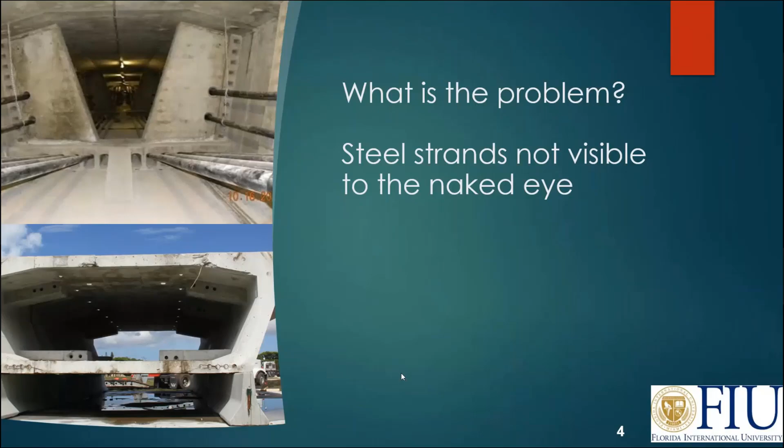Over the years that I've been involved in detecting corrosion or assessing the health of the steel strand in the segmental concrete bridge, in my opinion, the magnetic flux leakage method at the present time is the best method that is available. I will elaborate on some other techniques that may have some applications. Now, MFL, I'm going to explain what the MFL is. You can look at it as like an MRI machine: as a patient you go under the machine, the magnetic field is generated, and you can see the different organs and so on. So the MFL is really kind of the equivalent of the MRI for the bridge.

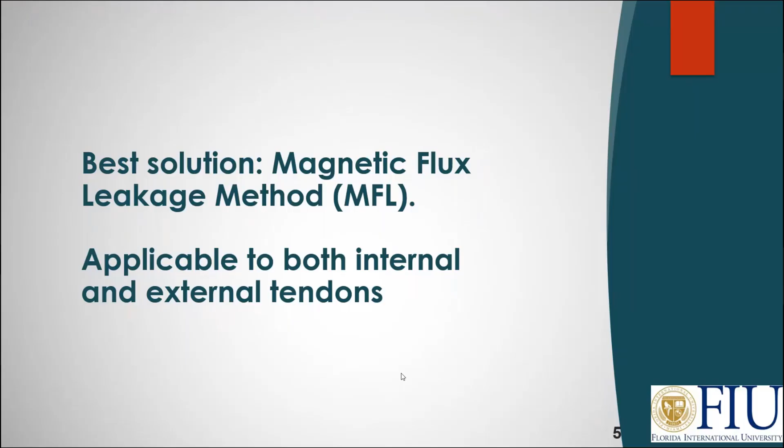Now, the good news is that this MFL is applicable to both internal tendons and external tendons. By internal tendons, I mean, for example, in the segmental concrete bridge, you can have a hole in the slabs, in the walls, in the top and the bottom, and then you have a steel strand in there. That's what I mean by internal tendon. External tendons are the tendons that are visible.

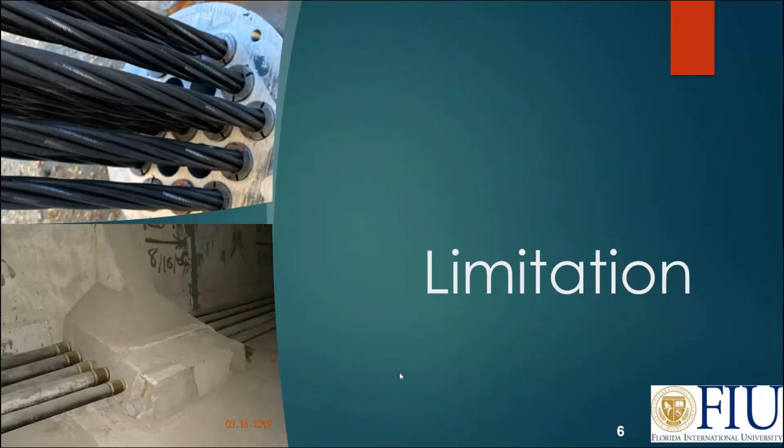MFL has limitations. MFL cannot be used in the areas where the tendons are interrupted, like deviators, or the anchorage area. In my opinion, the only method that I know of that could be applicable to the anchorage area or a deviator area is X-ray. Now, many problems actually happen in the anchorage areas, but MFL has a limitation that you cannot apply it to the areas where the anchorage is located.

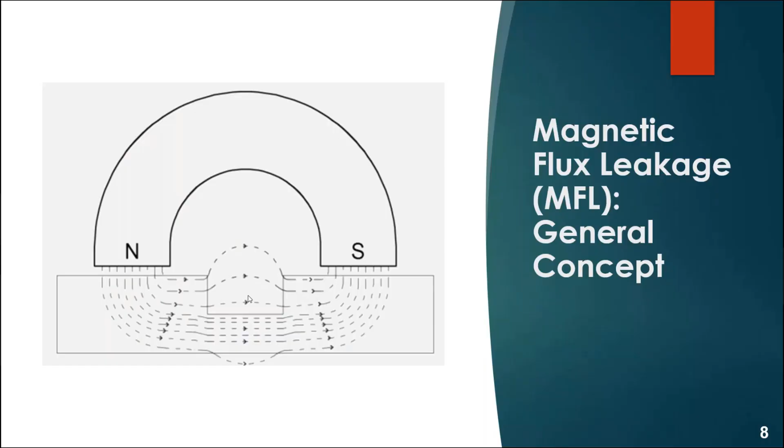Now, when there is a section loss due to corrosion or wire breakage, that airflow or the flux is interrupted, causing the flux to change, to leak, and that's where the name comes in, magnetic flux leakage. So the flux leaks because of the corrosion or a section loss and so on. Now we put a Hall sensor, and a Hall sensor is able to monitor the flux. When there is a change in the flux, the Hall sensor detects that by changing the voltage output. And that voltage output is what we use to try to say what the condition is.

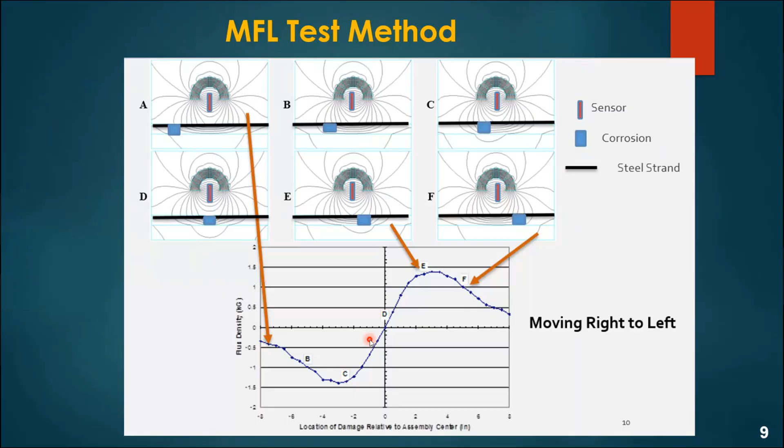Now, this is a busier slide, but concentrate just on the bottom. You see it like a sinusoidal. So when you cross an abnormality or a section loss, in general you get signals like this. It's not usually as clean as what you see over here. And another thing that I should say, this method is not something where you can just take a device and go and try to inspect something. You have to have some experience, some trained eyes, because the signal sometimes is modified based on what else is there.

So in general, there are two methods of MFL, what I call active MFL or residual MFL. So let's see what each one does. Active MFL is where you build a device that includes the Hall sensors and the magnet.

So you are taking the signal while the magnet is present. So that's why we say active MFL method. The disadvantage of this method in general is the magnet. Depending on what kind of magnet you use, you can use a permanent magnet or you can use an electromagnet. And usually the magnet is very heavy, and to incorporate a magnet inside the non-destructive equipment that also has the Hall sensors makes the equipment very heavy.

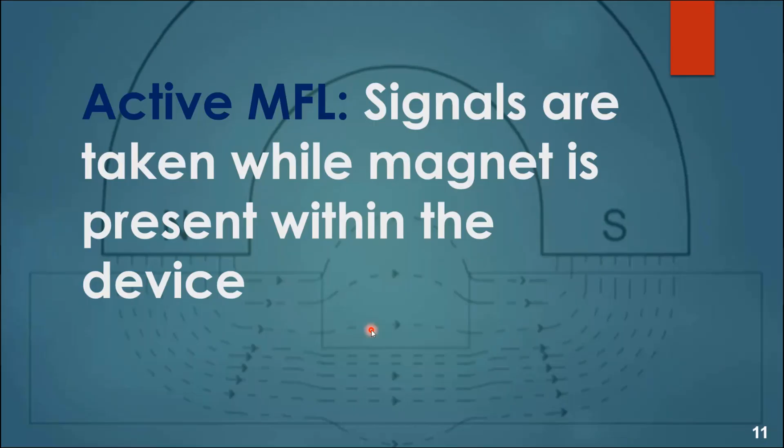Now, you're going to see that for external tendons, actually we are using an active MFL. What we have been able to do is develop equipment that, including the magnet, weighs only 12 or 13 pounds, and it's very light. But in general, active MFL is heavy because of the magnet. If you use a permanent magnet, it adds the weight. And if you use an electromagnet, that's really heavy.

Residual MFL is where you magnetize the strands first, and then you come back and with a non-destructive device, you monitor basically the flux, and that's called the residual MFL. So each one of them has an advantage and a disadvantage. But in our method, you're going to see that we are using active MFL, but we've been able to develop the equipment so that it's only 12 pounds.

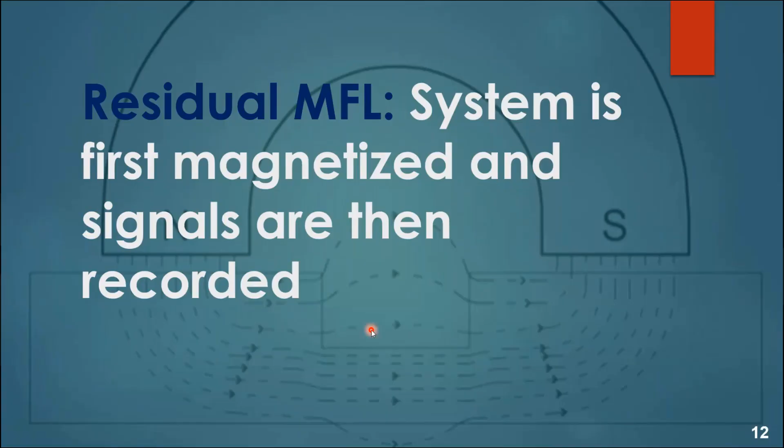I mentioned that the MFL is applicable to both internal tendons and external tendons. Now, the focus of this presentation is on external tendons, but we have done lots of work that was sponsored by Florida DOT on the internal tendons, and I'm going to just show you an overview because I know some people might be interested in that.

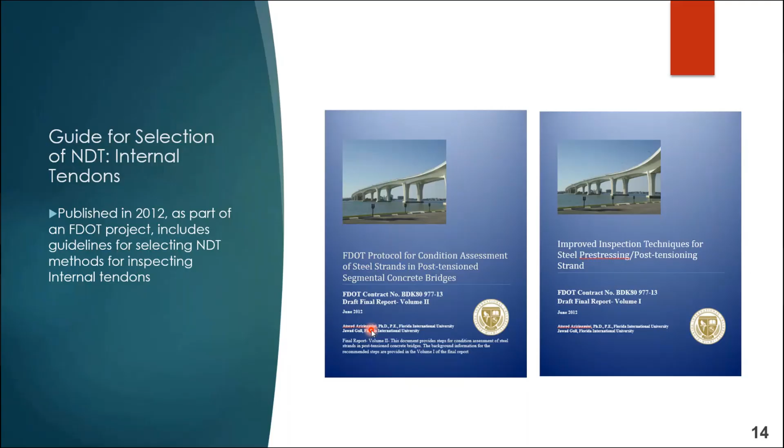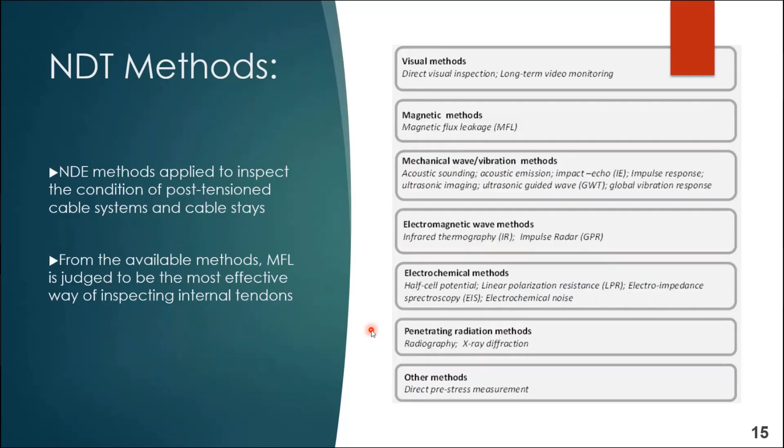Back in 2012, with a project that was sponsored by the Florida DOT, we conducted extensive work trying to identify all the available technologies for assessing the health of the steel strand in the internal tendon. We published two reports that are available from the Florida DOT. And this report has all the different non-destructive techniques available to inspect steel strands that are inside the thickness of a wall, a slab or a ceiling. In my opinion, even for internal tendons, really the best method is the MFL.

Just an overview very briefly. I'm not going to show you lots of results, because our focus is on the external tendon. But for internal tendons, we've been doing lots of work over the years, and in fact, I've been inspecting some of the segmental concrete bridges, including the Missouri Bridge back when I was faculty at the University of Nebraska, Lincoln. I've inspected the major segmental concrete bridge, the entire span of it between Nebraska and Missouri.

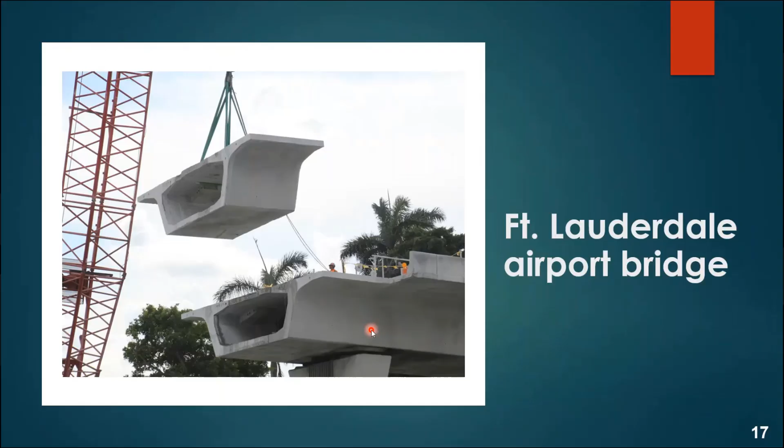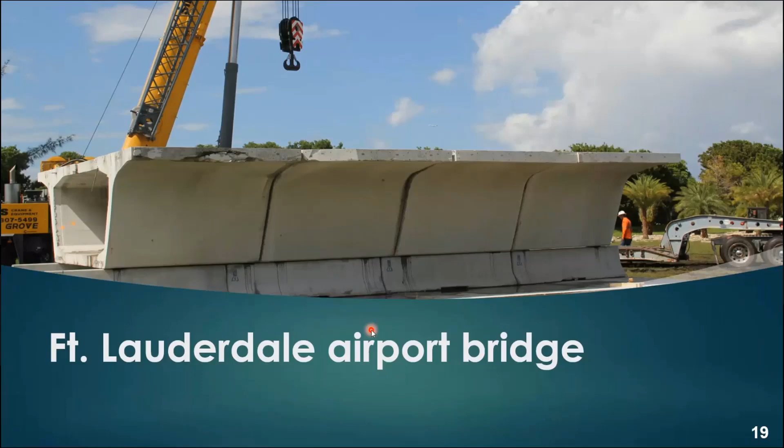At FIU, we have brought segments of a segmental concrete bridge that was taken out of service, not because of the condition, but because of rerouting the roads. Now, this shows the segments from one end. Good for us, but unfortunate for the bridge: there were a couple of ducts that were not grouted. That allowed us to place steel strands with a known corrosion level and then assess our technology.

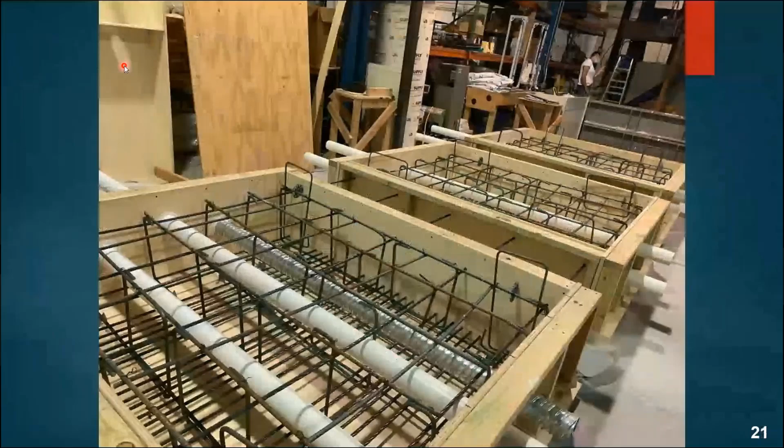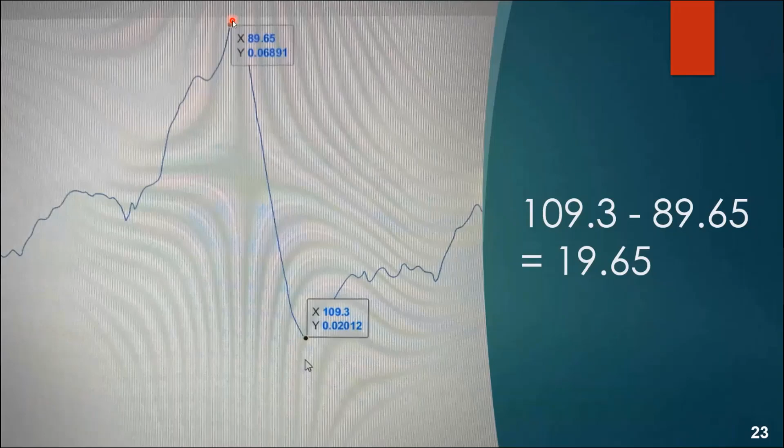Now, in the case of the internal tendons, the challenge really is that you have mild steel, and that mild steel masks the signal. But we've been able to solve that problem and assess the health of the steel strand inside. These are some of the results that we have obtained. Interestingly, I have not been able to find the reason, but when I subtract the x coordinates of the two points in the signal, that equals exactly the thickness of the slab.

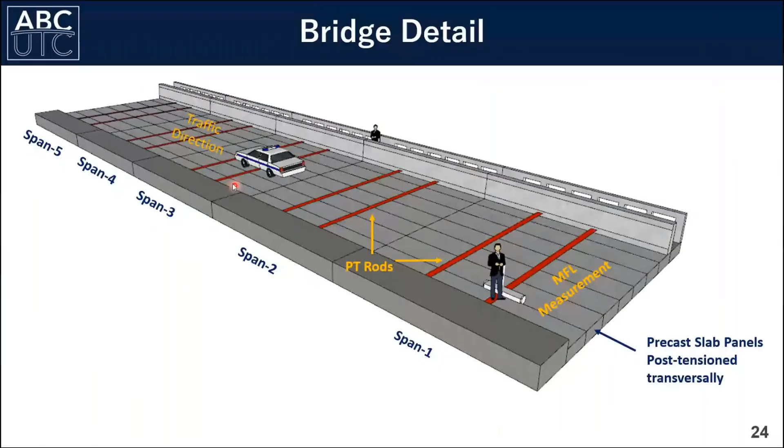We have tried our methodology for internal tendons on a bridge in Florida, and this is a device for internal tendons that we have. For the bridge that I showed you, we were able to detect the area where there was a possibility of corrosion, and that was verified by drilling a hole and looking with the borescope. Our signal and the borescope confirmed it: with the borescope we saw the corrosion, and with our device for internal tendons, we were able to detect the corrosion.

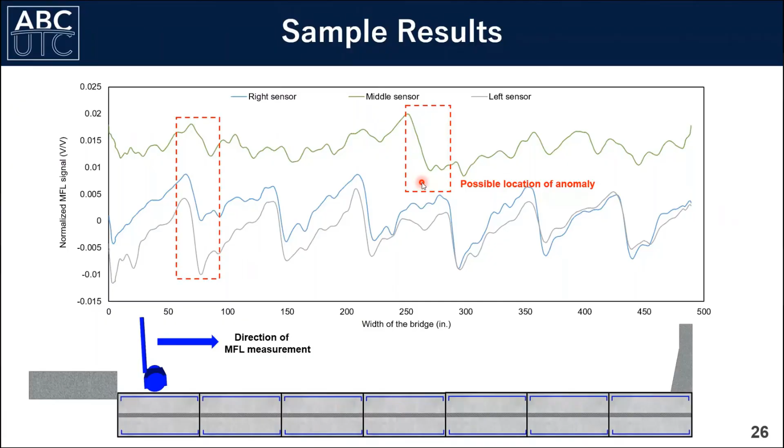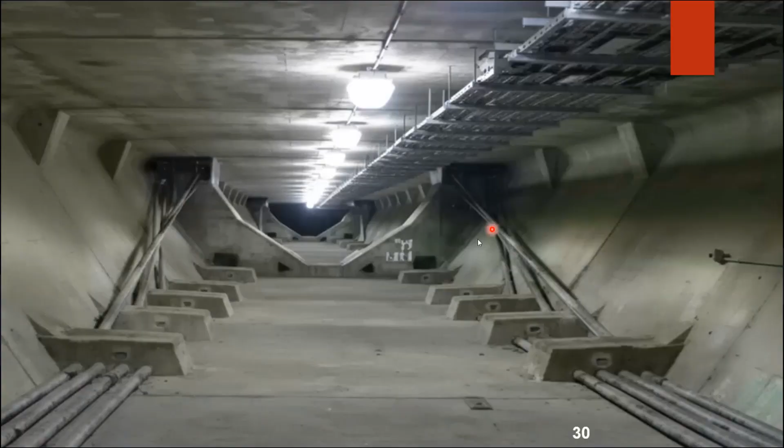The focus of today is on the external tendons. Here you see a photo of the inside of a segmental concrete bridge. Again, our limitations are that we are not able to do any inspection of the deviator or the anchorage area. Sometimes these ducts are very close to the ground, or they are very close together. We have two devices, and you will see later that they are able to inspect the straight portion.

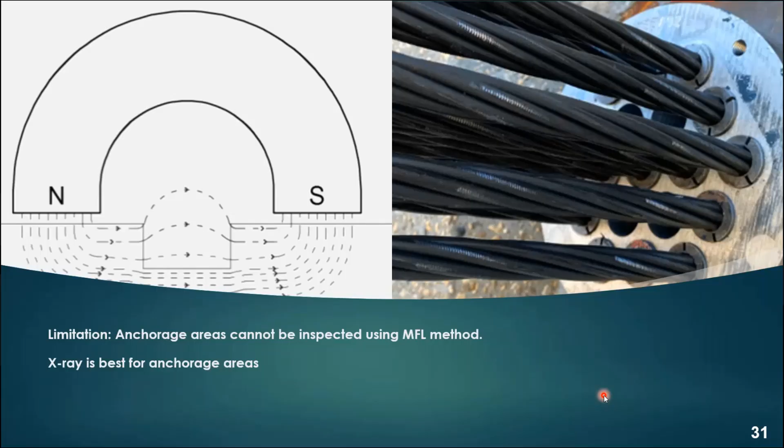We wrap all the way around, or if the tendon is such that we don't have any clearance from one side, either in the ceiling or the bottom, it can wrap just in a half-circle form. Again, the limitation, like I said, of the MFL is that we cannot inspect the anchorage areas or the deviator area. In my opinion, I think the best thing is the X-ray in that area.

Now I'm going to turn it to Dr. Ken Furton, who is going to present the very interesting concept of using dogs to detect the corrosion in external tendons. Thank you, Arturo. Looking forward to sharing with you some pretty exciting research that we've done related to canine corrosion detection. I'm a professor in the Department of Chemistry and Biochemistry.

My first slide is related to the fact that dogs have been used for hundreds of years for detection work. Most people are used to drug detection, explosives detection, maybe even microbes like mold detector dogs, human scent for tracking people, and so forth. The only other work in this area that we're aware of was some early work on corrosion under insulation of pipes that Dr. Ade Schoon in the Netherlands, who's somebody I've collaborated with, has done.

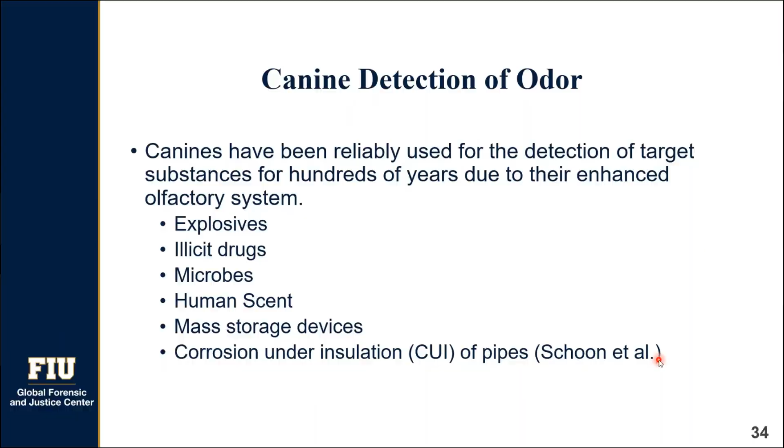Most recently, during COVID-19, we were the first in the country to deploy COVID-19 detector dogs at Miami International Airport, and they were extremely reliable, able to detect COVID. This was in a partnership with American Airlines and Miami International Airport, where if the COVID dogs alerted, the employees would go home and get tested with PCR, and the dogs were actually more accurate than the PCR tests. So we know dogs can be very reliable. The question is, can they detect corrosion with that same level of reliability?

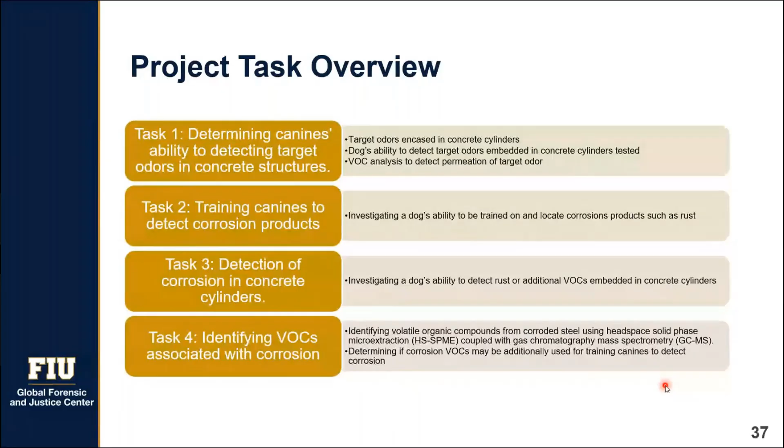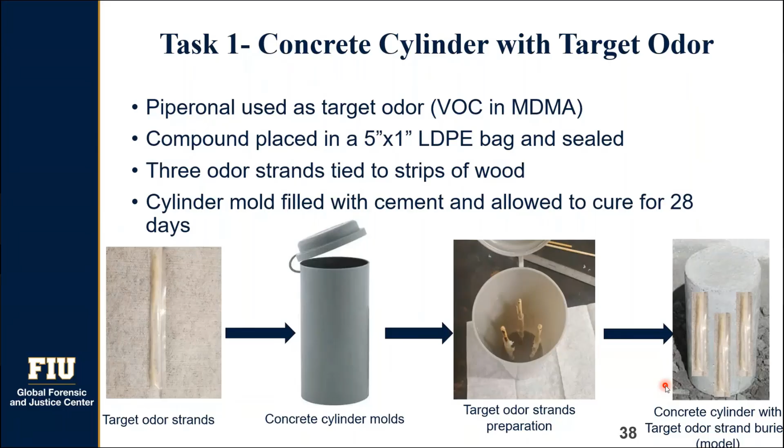In this next slide, the first thing we did was use piperonal, because in this case we used working drug dogs that were trained for ecstasy. We know they can detect piperonal as the volatile chemical of ecstasy, or MDMA. We put those into low-density polyethylene bags, something we call the controlled odor mimic permeation system. Then we put those into three odor strands tied onto strips of wood, filled cylinder molds with concrete, and cured it for 28 days to see whether the odor would even permeate out of concrete.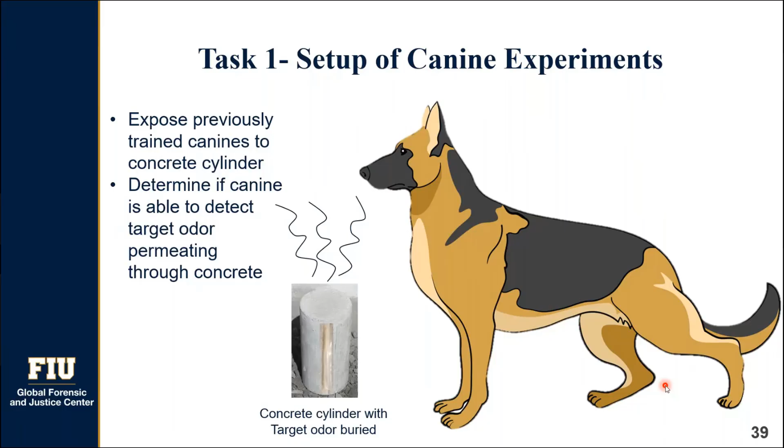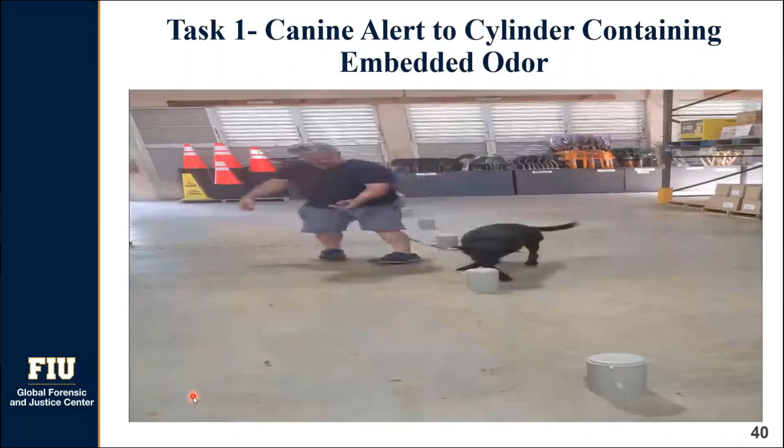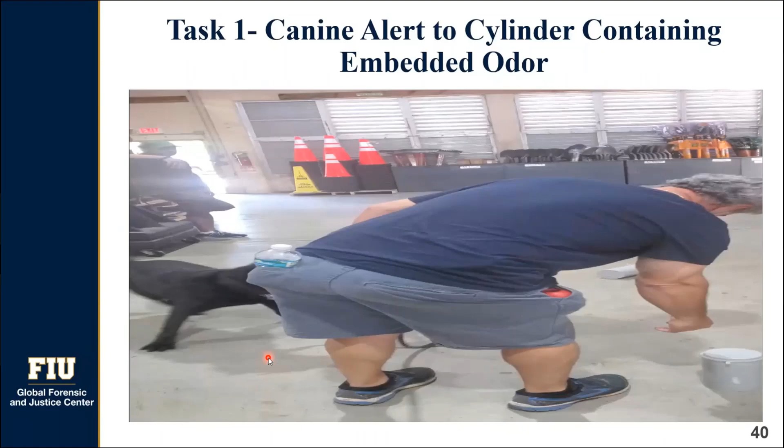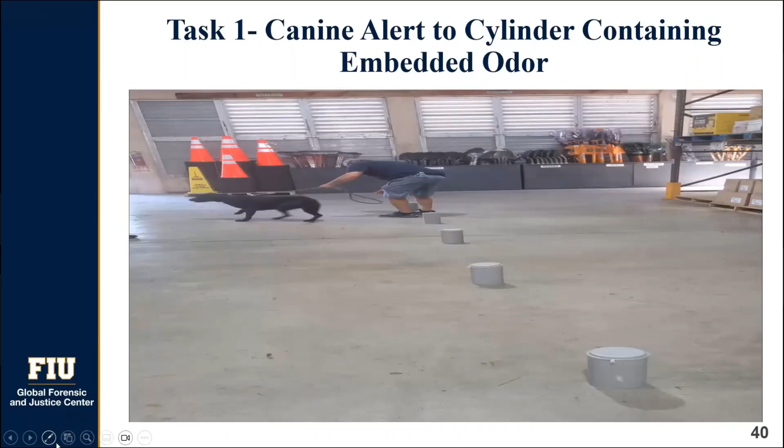I'll show you a video in the next slide where we have this piperonal within concrete, and the dogs are trained to a passive alert, or a sit. It's essentially a lineup, and if the odor is there, and we did this many times with multiple canines, we know that the odor is permeating through the concrete. We'll do it one more time so you can watch. This is a double-blind study. The dog and the handler do not know which one contains the piperonal.

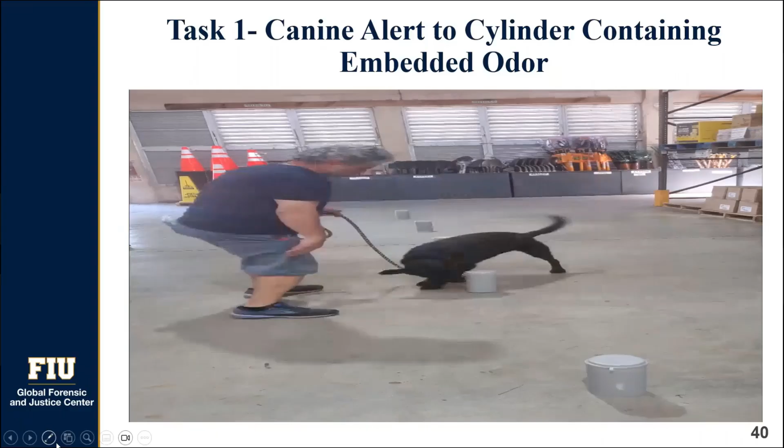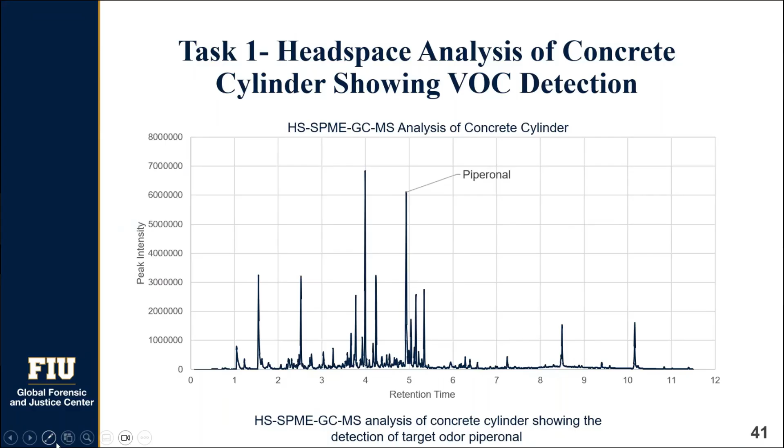And then we did a headspace analysis using gas chromatography, mass spectrometry of those cylinders. You'll see the piperonal peak, but you also see a variety of other chemicals that are there. So we are in the process now—this is an ongoing study, not a complete study—of trying to identify what are the other odor chemicals that are there, so that the dogs could be trained on corrosion odors.

for increasing the potential for using canines in this application. So the next slide shows: can dogs be reliably trained just to detect rust odor without them even being encased in concrete? So we took 5 grams of rust in the form of iron oxide in these low density polyethylene bags where we had the piperonal before, and we did black rust and red rust.

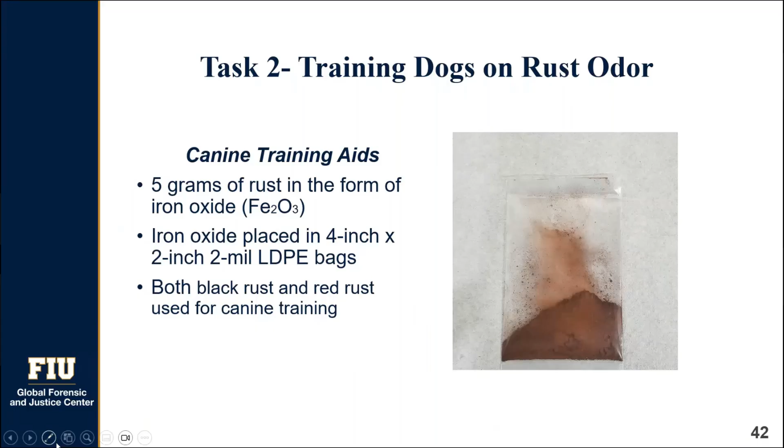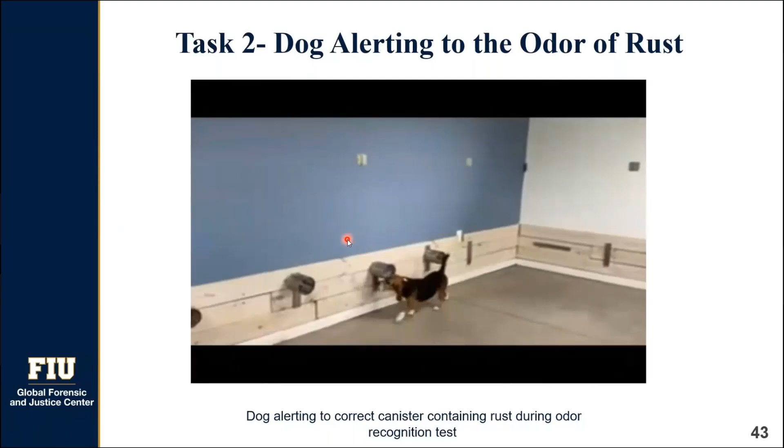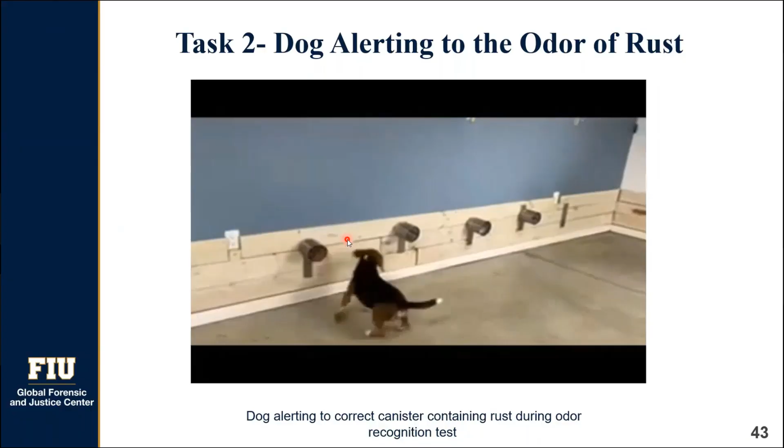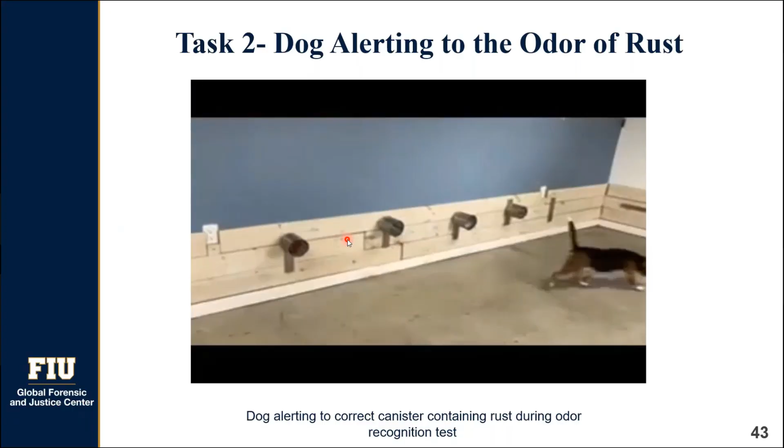And you'll see in the next video a lineup, and these are with the different dogs. These are beagles that were not trained—they're not law enforcement, they're just trained for odor detection. In this case, it's very clear these dogs are trained with a lineup: if the odor's there, they sit or stare and wait for the reward. And all these dogs are reward trained, so they just get praise or food or whatever they like to do. So beagles like to eat, so these dogs got food.

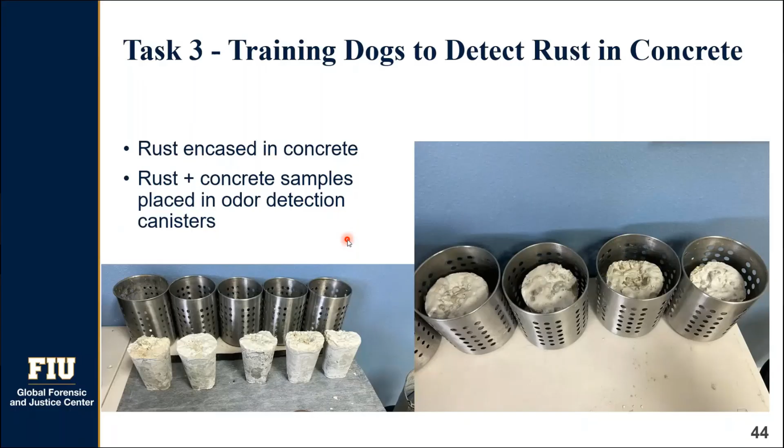And then the next task, if you go to the next slide, you'll see that we wanted to say: okay, if you took those same rust samples, put them inside concrete—again, there's no pyranol or any other odor—and these dogs had never experienced corrosion before this, will they be able to alert to the corrosion materials within concrete samples? So if you look at this next video, you'll see a lineup with the rust within the concrete.

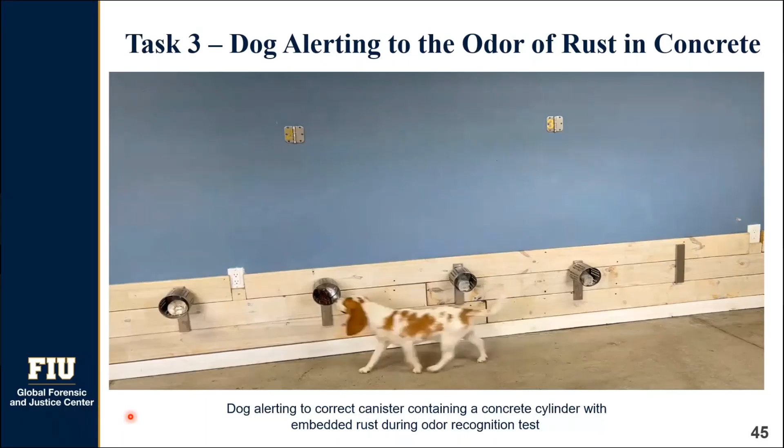And you'll see one of the things that's exceptional with the canines is they're very, very quick. So they have a high degree of mobility, and they're trained to go to whatever the highest concentration of the odor is, if there's odor there.

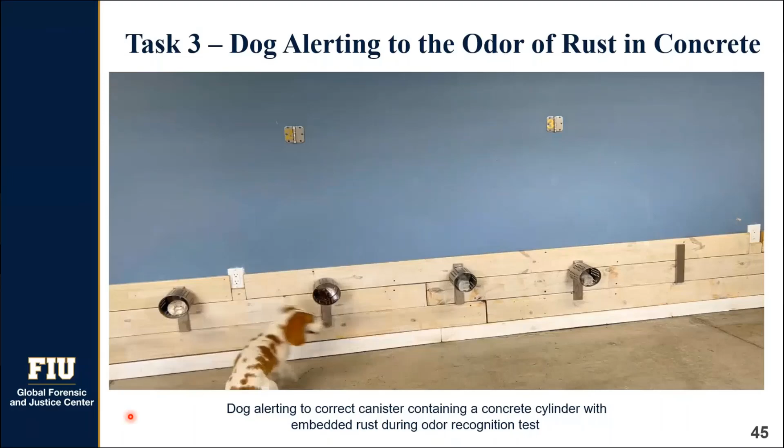And then in task 3, we did a number of dogs. We did this with 5 different canines, and these are the beagles in this particular test. You see that we were able to receive a very high level of sensitivity and specificity. We still have other dogs that we've been doing work with that we're also going to combine all this information into an article we're going to be publishing. But in general, they really have remarkable selectivity, sensitivity and specificity in terms of identifying the location.

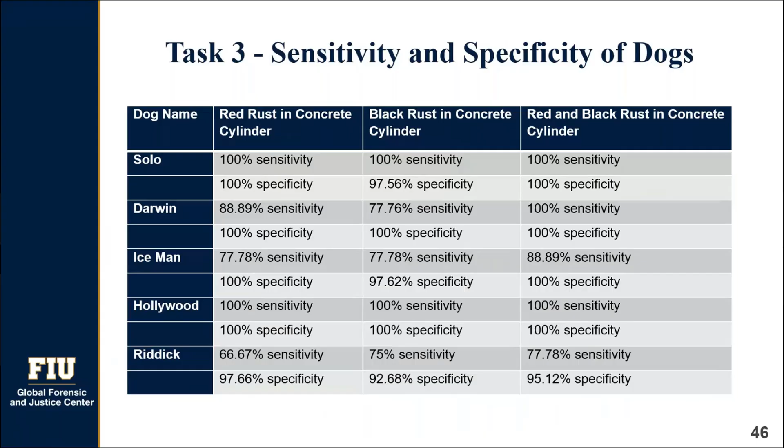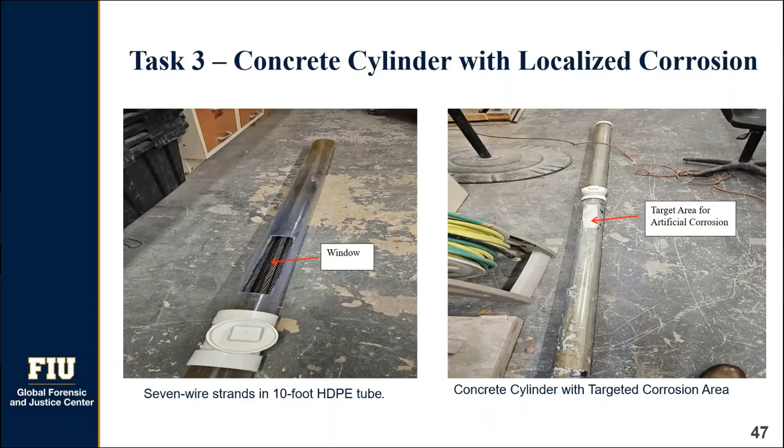And then if we switch to searching localized corrosion—so these were seven-wire strands in 10-foot structures within high density polyethylene tubes—we trained a different group of dogs. These were working dogs, but they had not ever been trained on corrosion or propirenol. We trained them on the same corrosion samples, and then we're looking to see if they could localize the area. So you'll see in the next video one of those dogs doing the search.

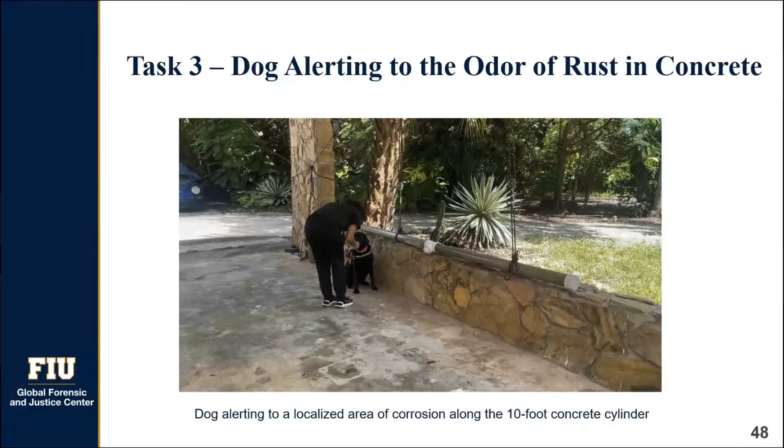And again, the dogs are trained just to, when they find the odor, stop, sit, and then wait for their reward. In this case, it's a toy.

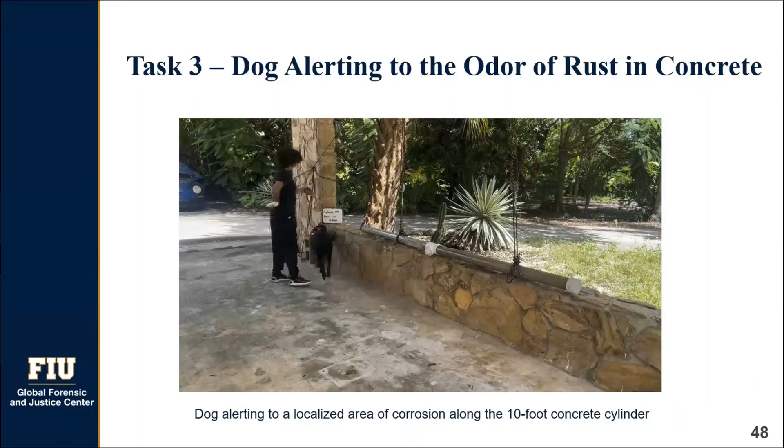And then what we're currently doing, as I mentioned, this is an ongoing study—it's not ready for deployment yet, because we're looking at the ability of odor to permeate out of high density polyethylene, and also we're looking at the volatile chemicals within the samples. So what we found is we see a lot of very consistent chemicals within corroded steel rod samples using these materials that we've been working with Dr. Aturad's group. It's the same kind of materials that, in fact, we've done some side-by-side tests where we use his technique with the sensor, and then the dogs immediately afterwards.

We're trying to figure out, okay, what are the odors that the dogs are alerting to? So there are odors that they're able to alert to. We haven't completed this, but what it appears to be, at least an early indication, is that there's probably a microbial component. Some of these compounds that are very consistently seen are what we call MVOCs, or microbial volatile organic compounds. So there's probably a microbial component when the steel starts to corrode, and then those microbes are producing volatiles that the dogs are able to detect. Because if you just take corroded iron oxide, it has very little smell itself, and there's iron oxide everywhere.

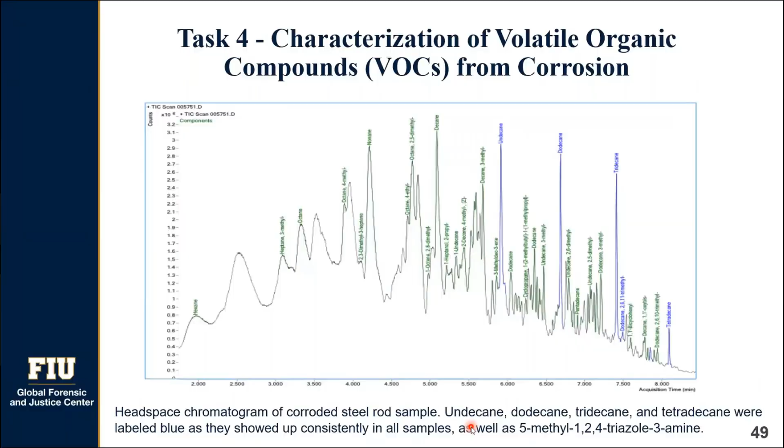So at this point, we are going to turn back to the magnetic flux leakage method as applied to external tendons. One of my students, Carlos, has been assisting on this project. Now, Carlos is traveling, but he did record a video, so his portion of the presentation is going to be shown as a video.

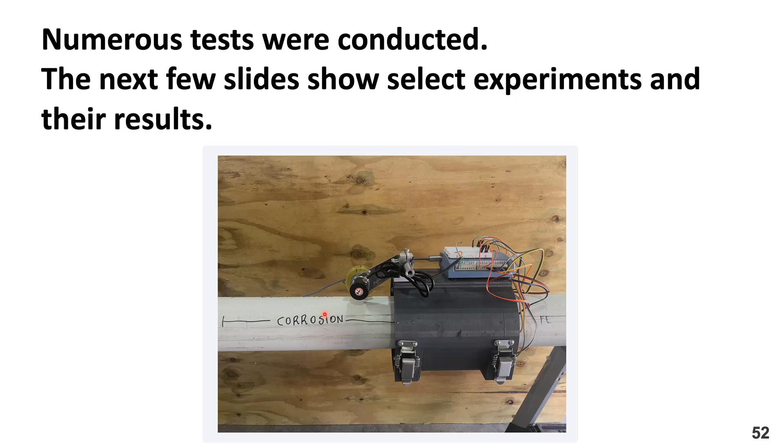Using this device, several experimental tests were conducted, which I will describe in detail in the following slides. The ultimate goal of this research is to detect corrosion in strands embedded inside ducts. However, we started by evaluating a simplified scenario in which discontinuities were created by introducing simulated cuts in the strands.

In the first image, you can see the transparent duct used during these experiments. The transparency allowed us to clearly observe the simulated cuts, as shown in the second image. In the top image, you can see all the strands used in the test. Most of them are continuous, extending from one end of the pipe to the other, but a few contain simulated cuts. The initial objective was to determine whether the device could successfully detect these discontinuities.

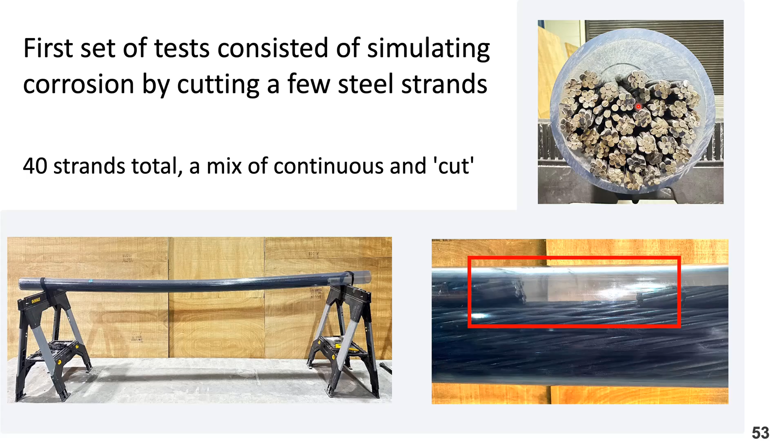This slide shows the results of four tests performed using the previous setup. In the first figure, 40% of the strands have simulated cuts. Out of 40 total strands, 24 remain continuous while 16 contain cuts. The red dashed lines indicate the approximate location of the simulated cuts, and each colored curve represents the voltage measured by one of the Hall effect sensors. For example, the purple curve corresponds to sensor 4.

As you can clearly see, the signal experiences a significant disturbance when the device reaches the section containing the cuts. Before that region, the signal remains relatively stable, showing only small fluctuations due to measurement noise. However, as soon as the device enters the damaged section, a strong disturbance appears, effectively indicating that magnetic flux leakage is occurring and that this region should be inspected.

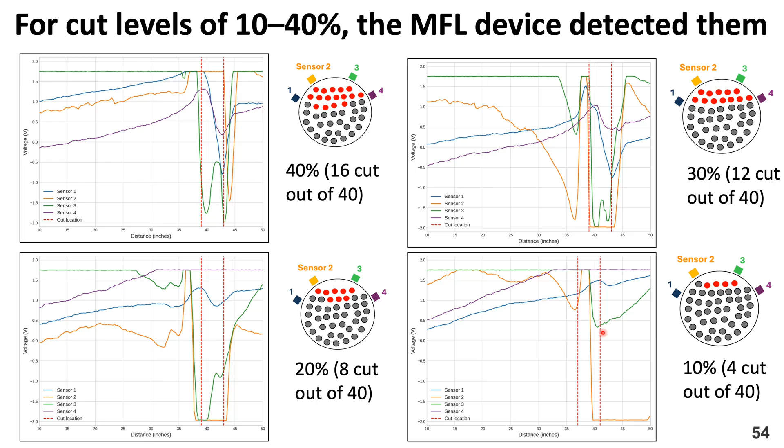The same procedure was repeated with 30%, 20%, and 10% simulated cuts, which corresponds to only 4 cut strands out of 40, and in every case the signal disturbance can still be clearly identified. The final test in this series was performed with only 5% simulated cuts, meaning only 2 of the 40 strands contain cuts. Even with such a small percentage, the signal disturbance can still be clearly observed.

At this point, an important question naturally arises. So far, we have shown that the device can clearly identify abrupt discontinuities, such as strand cuts. But corrosion is typically not an abrupt break; instead, it's a gradual deterioration of the strands over time. So the natural question becomes: can the device also detect actual corrosion? That's exactly what we will evaluate next.

To answer that question, some of the strands were artificially corroded using an accelerated corrosion process consisting of a saltwater bath and a DC power supply, as shown in the photograph. The second image shows one of the corroded strands. Unlike the previous simulated case, the damage here is gradual rather than abrupt, and also non-uniform, with some regions experiencing more severe deterioration than others.

The orange line represents the corrosion profile along the strand. For the next test, we used 23 healthy strands and one corroded strand. At its most critical section, the corroded strand lost approximately 57% of its cross-sectional area. Considering all 24 strands together, this corresponds to only about a 2.4% loss of the total strand area in that section.

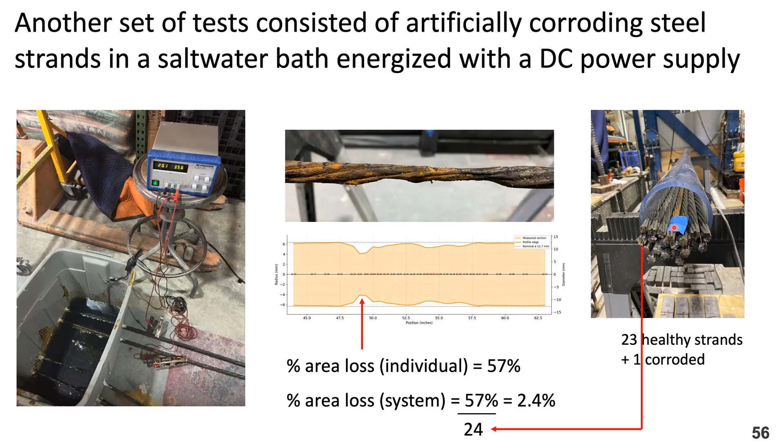It's positioned away from the duct surface, meaning it's relatively far from both the magnets and the sensor. And even though the corroded strand is located farther away from both the magnets and the sensors, we can still observe a clear disturbance in the signal, precisely in the location where the maximum cross-sectional loss occurs. As soon as the device reaches the beginning of the corroded strand, the voltage signal is affected, while it remains stable everywhere else.

It's true that this disturbance is smaller than in the previous test involving the simulated cuts. However, we should remember that the corroded strand is farther from the device, and the overall system has experienced only about a 2.4% loss of steel area. Despite these challenging conditions, the disturbed region still clearly identifies the location of the corrosion.

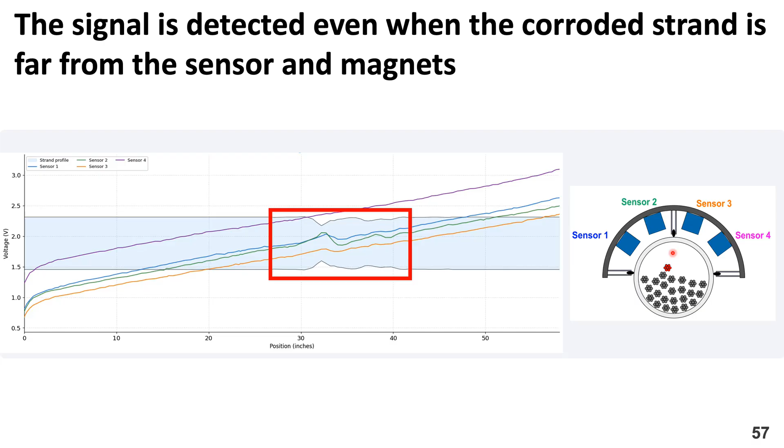What happens if the corroded strand is located closer to the duct surface, and therefore closer to both the magnets and the sensors? As expected, the signal disturbance becomes much more pronounced. We can clearly see that sensor 3, shown in orange, strongly detects the defect, while sensor 2, shown in green, also registers a smaller response.

This observation is very important because it provides another insight. Not only can we identify the damage section along the length of the pipe, but by analyzing the responses from the different sensors, we can also estimate the approximate circumferential location of the defect within the duct.

In this case, sensor 3 experiences the largest disturbance. Sensor 2, the green one, shows smaller responses, and sensors 1 and 4, the purple and the blue ones, exhibit almost no disturbances. From this pattern, we can infer that the corroded strand is located near the middle of the duct and closer to sensor 3 than to sensor 2.

Once we have this analysis, another important question arises. So far, we have shown that the device can detect both simulated cuts and actual corrosion. However, in real bridges, ducts are typically filled with grout. So, if the duct is grouted, will the device still be able to detect corrosion?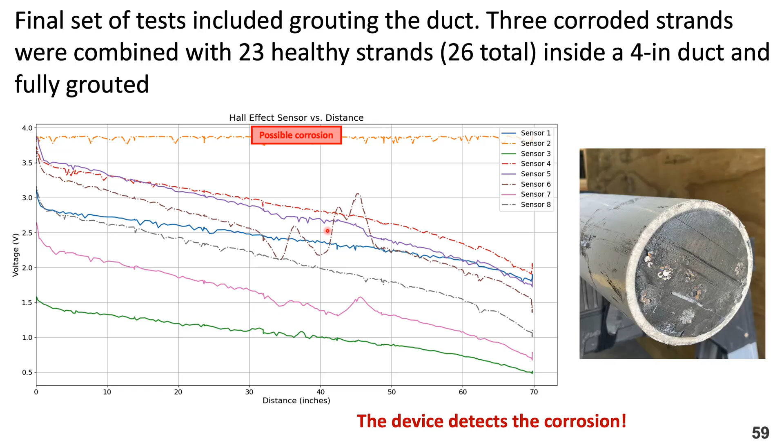We can clearly observe that sensor 7, the pink one, and especially sensor 6, the brown one, identify the location of the damage region where the corroded strands are located. These results clearly demonstrate that using the MFL method, the proposed devices are capable of detecting corrosion even under realistic conditions with grouted ducts.

Finally, I have included a short video showing the device in operation. The idea is to observe the behavior of the signal. When no defects are present, the signal should remain stable, and when the device reaches the damaged region, in this case the 3 corroded strands, the signal becomes disturbed.

This is a lab version of the MFL device with a total weight of about 12 pounds, based, as mentioned before, on the active magnetic flux leakage method, and it has a fast and reliable operation. Now I am going to play the video.

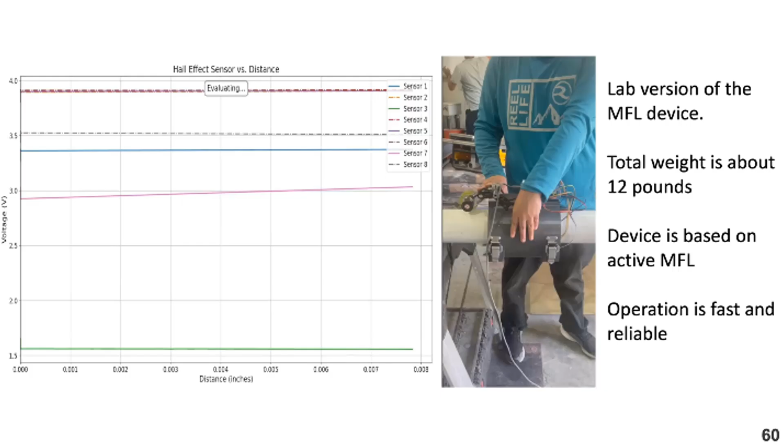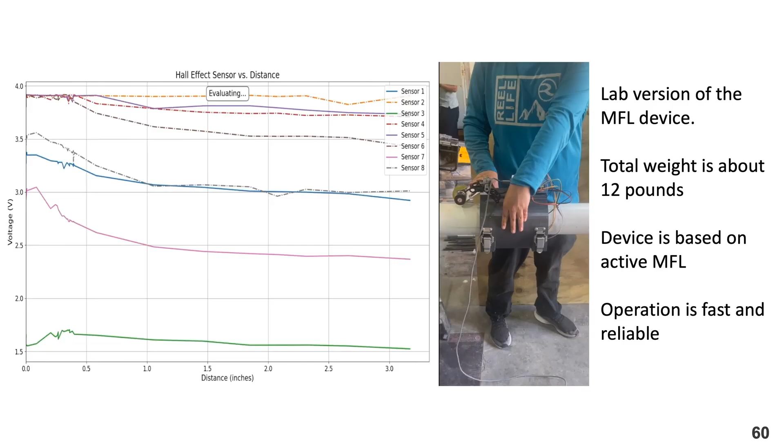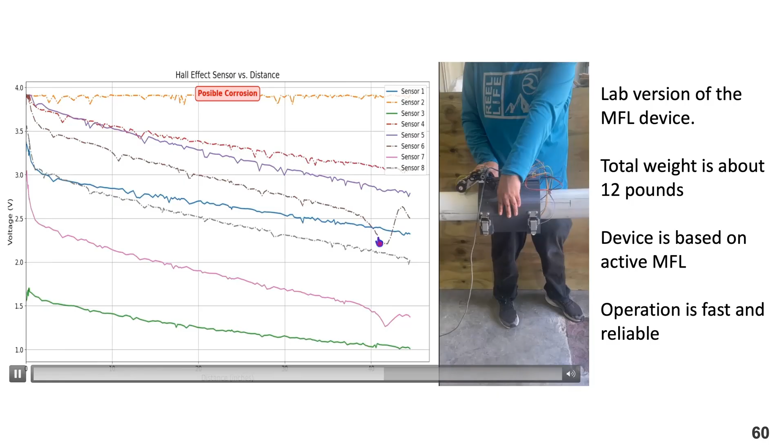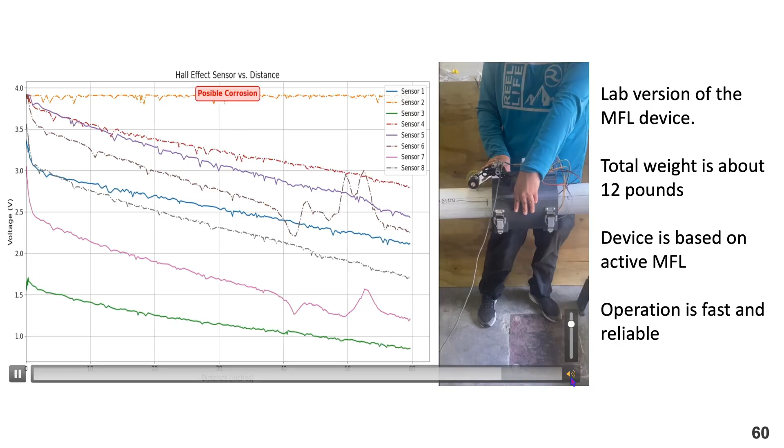As you can see, the signal remains stable during the initial part of the scan, indicating that no defects are present, except for some measurement noise. But as soon as the device reaches the corroded section, the same signal disturbance that we observed in the previous plots appears. We can clearly see that. And then at the end part of the duct, where there are no defects, the signal is stable again.

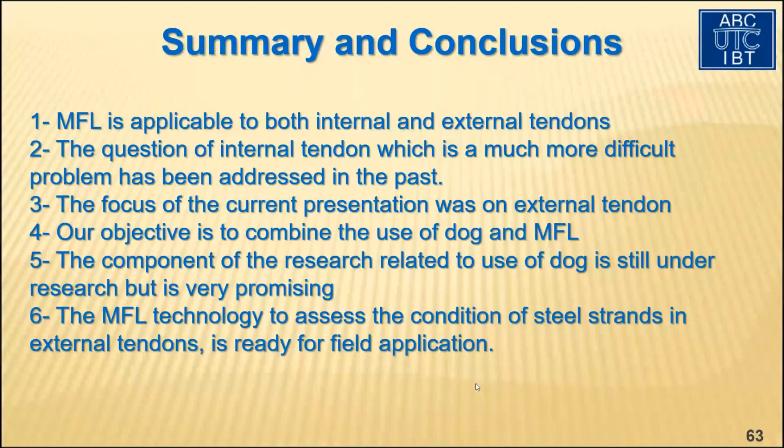The component of the research related to the use of dogs, as Dr. Ken Furton said, is still under research, but it is very promising. It is not yet at the point of field implementation. The MFL technology to assess the condition of steel strand in the external tendon, on the other hand, is field implementable.

The accuracy of MFL to assess the condition of a steel strand in the duct is extremely good. In fact, in the laboratory, we are able to detect 2.5% section loss. And as we said earlier, the field accuracy is about 5% or so.

The MFL method, as I mentioned, has limitations. Areas near the deviators and the anchorage regions cannot be inspected using the MFL method. X-ray, in my opinion, is the best way to inspect those areas.

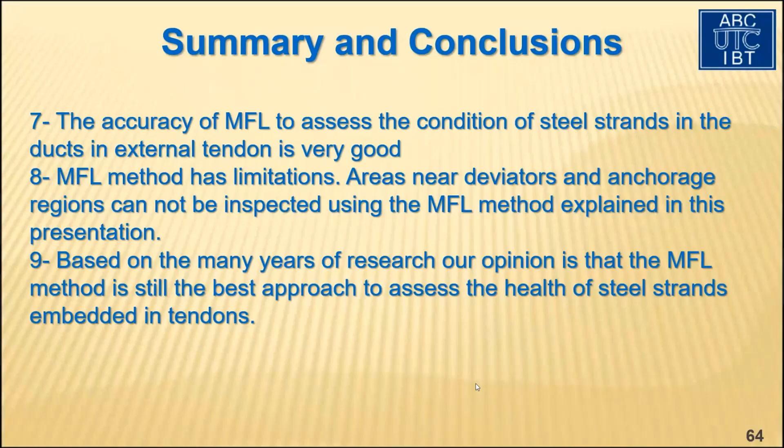Finally, I can say, based on more than 25 years of conducting research in this area, that in my opinion the MFL method is the best available method right now to assess the health of steel strands embedded in internal or external tendons. So with that, we conclude our presentation.

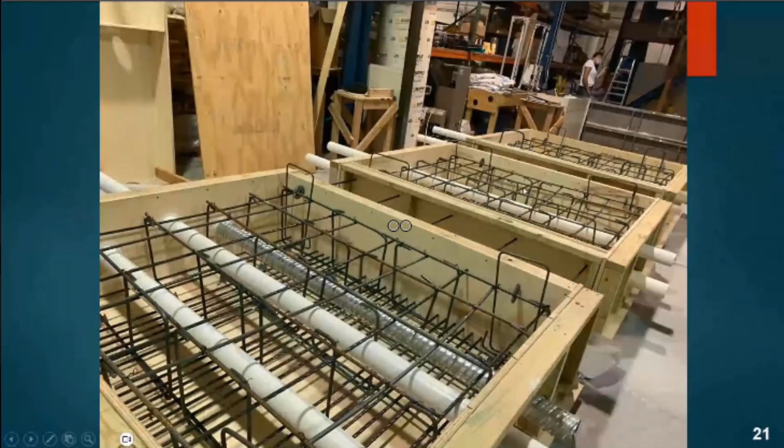That's a question about internal tendons. Let me bring up this work we did related to internal tendons. These specimens are made of three put side by side, and the ducts are connected here. We put different steel strands with different levels of corrosion, and we were able to detect it. Now the question is how do you get rid of the effect of additional strands, because the strands could be corroded too. The way we've done that - first of all, for the internal tendon we use a permanent magnet, a very heavy magnet, about 120 pounds, probably the strongest permanent magnet there is.

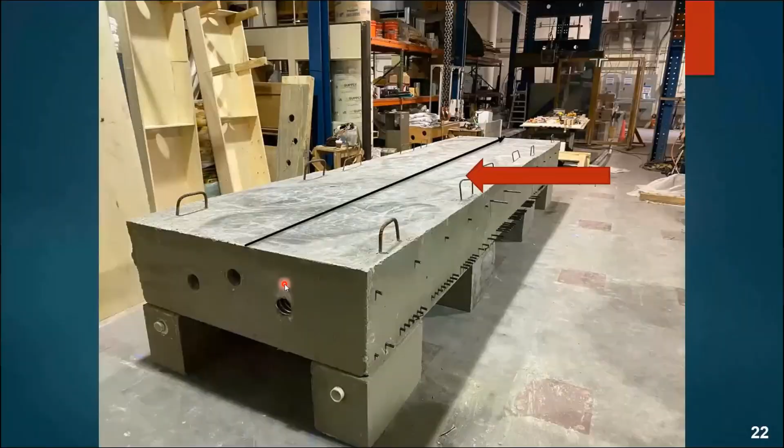Let's say if I have a tendon in one of these metal ducts, I put 10 seven-wire strands, and a couple of them are corroded, and there's lots of mild reinforcement present - on top, transverse, longitudinal, and so on. So the way we do it is we magnetize the system from the bottom, but then we take the reading from the top. When I magnetize from the bottom, I magnetize everything between the bottom and the steel strand to a higher degree compared to what's up there. But when I take a reading from the top, because I haven't magnetized the mild reinforcement, I eliminate its effect. That's a very simplistic way of explaining it, but that's how we're able to eliminate the effect of the mild reinforcement around the embedded steel strands.

Now you can do the same thing with pre-stress girders. You've got to do a little more work in that case, but that's how we've been able to eliminate the masking effect of the mild reinforcement around the steel strand.

We had a question here: we recently had a case where we had to recommend strand inspection for possible corrosion on a segmental box girder for light rail transit, to do a conditional assessment. They were wondering, could this work for duct and strand embedded in concrete? And specifically asked about a blister with grouting. I don't know about that specific condition.

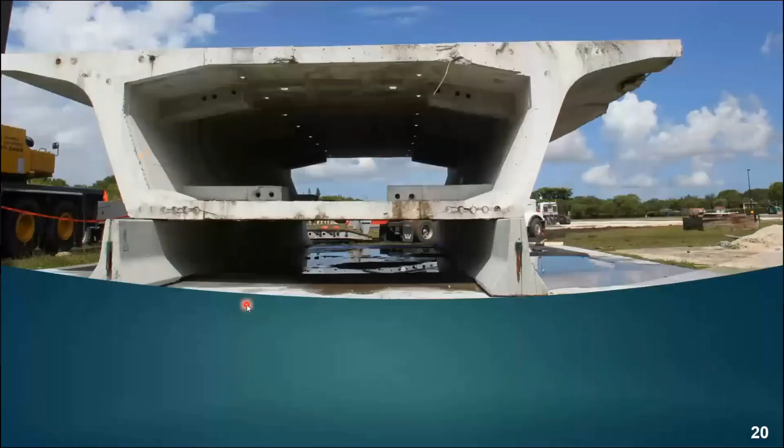For example, we've done lots of testing with this kind of segmental concrete bridge segments. We brought these segments from the field to the laboratory, and because there was an empty duct, we placed a steel strand with different amounts of corrosion, and we were able to detect it. So if you have this kind of condition, we can detect it.

Now, the places we're not able to do much is where you have a deviator or anchorage area. But if you have a straight portion, okay. The problem becomes more challenging when you have two ducts on top of each other. Usually in the walls, it's easier to detect. But if you have a condition similar to what you see here, yes, we can inspect it. And if you have external tendons, we're able to do that too.

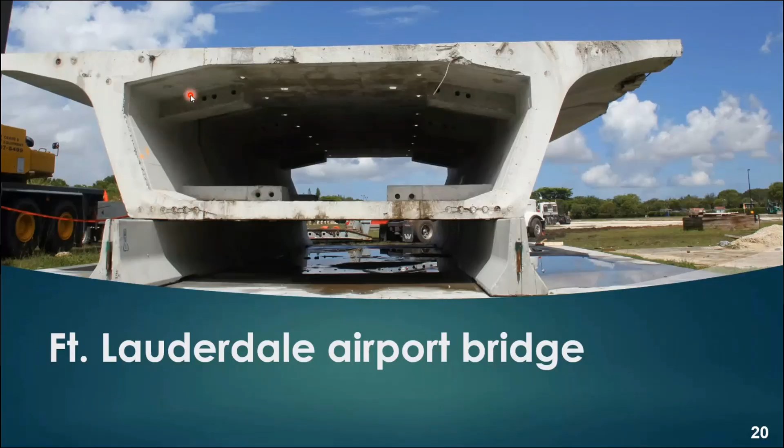Yes. Good, good. The second question is, did experimentation include the corroded wire near the center of the bundle, either in ungrouted or grouted condition? And you talked about that. Yeah, that's a good question. First of all, our device has sensors all the way around. So Carlos is only showing 4 of them. There are more sensors there.

Now, usually in a duct, in the discussion that we have had with the states and the Florida DOT, usually the corrosion happens in the strands that are close to the surface or the outer layers. And when we have that condition, because we have many sensors, we are able to say where the corrosion activity is. Now, if I have something right in the middle, that is very unlikely. The chance of having a strand in the center of the duct corroded, we are told by the bridge inspectors, is rare.

In those cases, it is a challenging problem, and we may not be able to accurately say that there is a corrosion activity in the strand. But usually, from the feedback that we have had, the corrosion is usually at the outer layers, and because we have many sensors, we are able to say where along the length and what portion of the duct there is a possible corrosion activity.

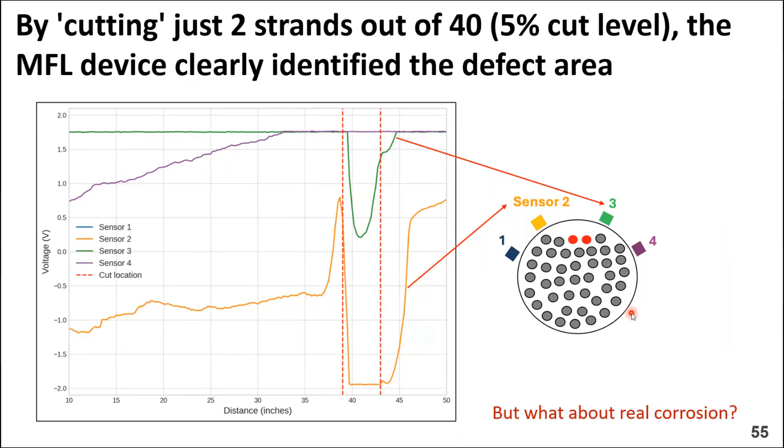Okay. And I think this question here can apply also to Ken. How do we know if the corrosion is in the concrete, an impurity in the concrete mix, or the cables? Yeah, I think maybe with further research, we could look at the VOCs that might be emanating, if we're doing a complementary technique, and this may not involve the canines, it may just be directly collecting the odor and then running instrumental analysis. I would suspect that you could potentially differentiate that, but that would be additional work.

Let me elaborate on this one. The MFL method, again, is detecting the section loss, where the steel turned into some corrosion product. Now, people have claimed that they can detect corrosion where they identify the cavity with the sounding method. We should note that where you have a cavity doesn't mean that you have corrosion. There have been cases where you open it up and actually make the problem worse, because now you have the moisture and the oxygen, both of them, and the corrosion starts.